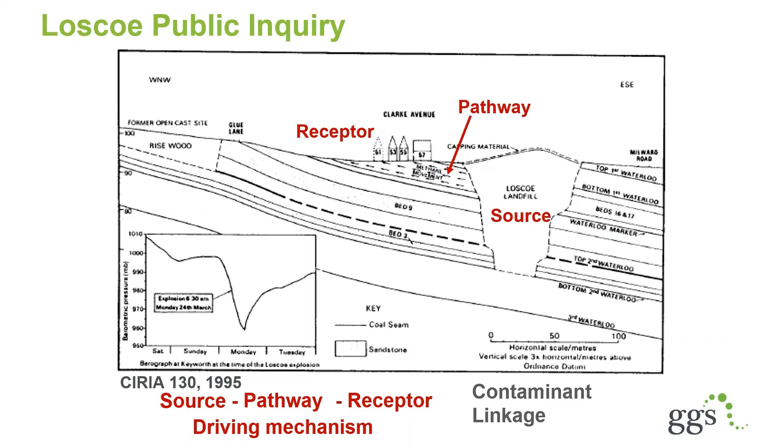Since then, there's been a raft of guidance documents on how to monitor, how to risk assess ground gases, but we still have incidents occurring. And one of the more significant or more serious incidents took place in Scotland in 2013.

This was a modern social housing estate built by Midlothian Council in 2009. But unfortunately, in September 2013, a number of the council tenants were overcome by gas. They were rushed to accident emergency, and the affected properties were evacuated.

Because other people on the housing estates were also affected over the following months, by April 2014, the local NHS trust set up an incident management team to investigate what was going on. Their findings identified the source as being shallow mines gas from shallow mine workings immediately beneath the estate.

In 2016, the local authority came to the decision to actually demolish the whole estate and start again as a way of treating the problem. None of the properties had ground gas protection systems installed within them. I should say that there was a number of court cases, and the leading consultant who led the development actually ceased trading as a consequence of legal actions.

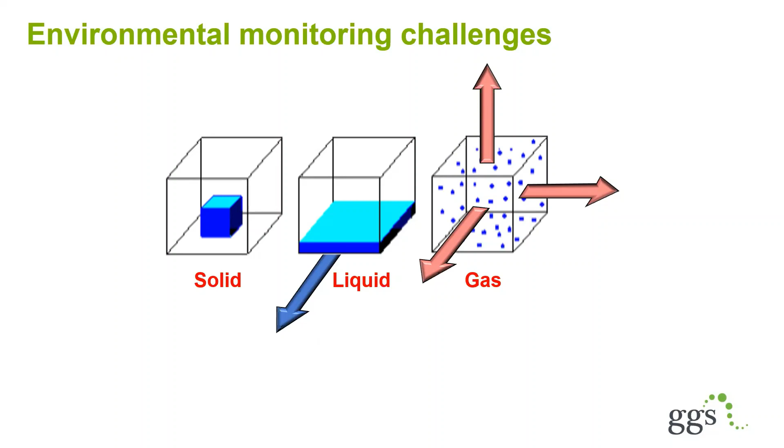Liquid contaminants will flow down to the water table and then flow down gradient, so they have a predicted plume of contamination which flows down gradient and can be modelled and predicted. However, ground gases can expand and contract and potentially move in all directions, so much more variable than other forms, and more so because of their viscosity.

The viscosity of water is given there, but of air or ground gases, that has a viscosity which is 50 times lower, which means that it can move through the ground quicker and go further than an equivalent liquid contaminant.

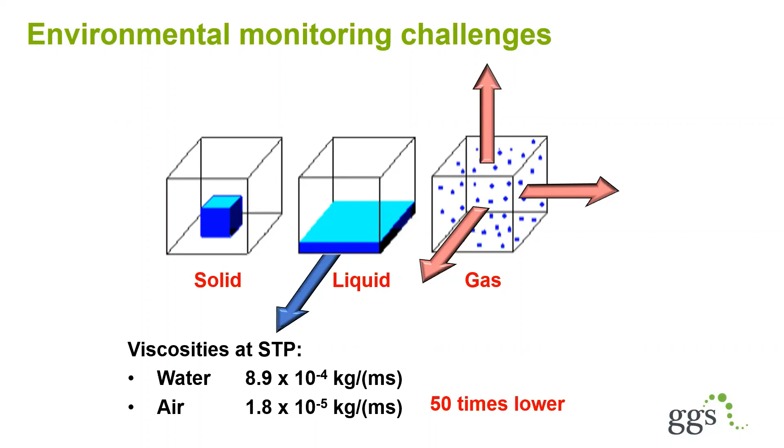So how does ground gases move through the ground? Well, it's got three forms or three modes of transportation. We have that advective pressure-driven flow, as we saw in Loscoe. We have a diffusive flow where it moves from areas of high concentration to areas of low concentration. And that typically occurs around sources of contamination, such as former landfills.

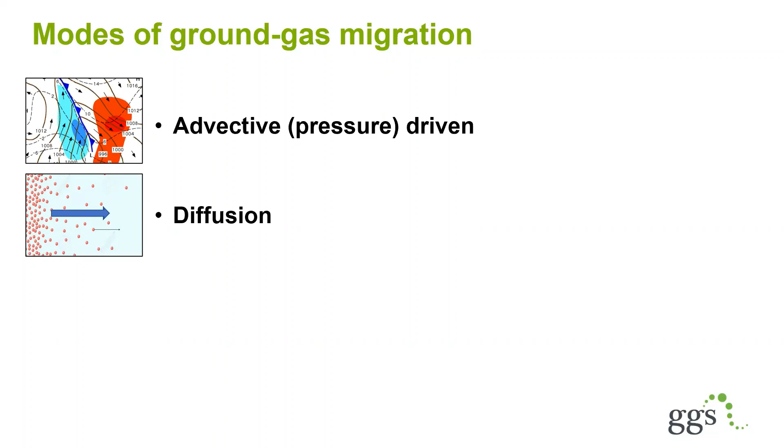The Environment Agency has calculated that there are probably 21,000 former landfills in England and Wales. Every town and city will be surrounded by a ring of those former landfills, and a lot of our work is associated with them, particularly as new development expands out from where towns or cities used to be, moving onto areas which were thought to be out of sight, out of mind. Those former quarries and gravel pits that have been infilled with waste are now in prime development locations and are often a major cause of ground gas contamination.

So those two modes of transport occur in the unsaturated zone above the water table. But we also can get gases dissolving into the groundwater and travelling down gradient below the water table. So those give us the three modes of transport.

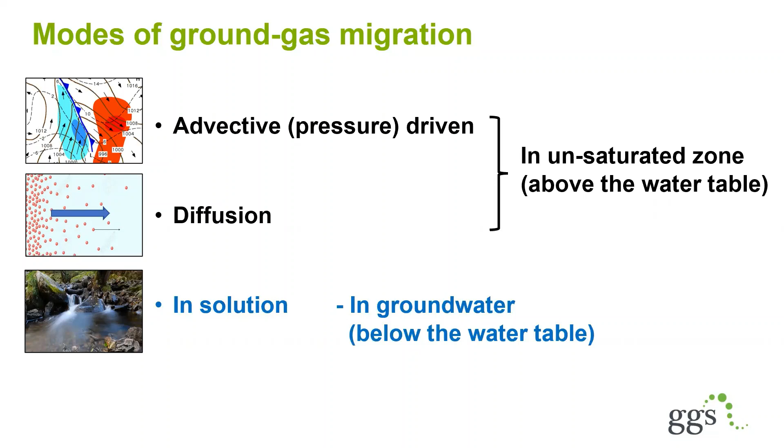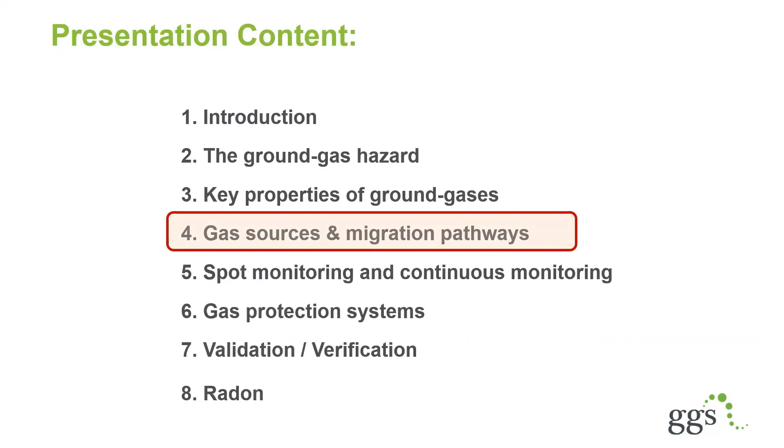Let's look at that source pathway receptor pollutant linkage in a little bit more detail. In line with British Standards guidance, BS 8576, where ground gases are expected to be present, it is required that a conceptual site model, including a schematic cross-section, is presented as part of the risk assessment process, so that the sources, the pathways and the receptors and the relationship between them can be clearly identified and communicated to all the stakeholders, which may include non-technical people. A diagram such as this is a way of clearly defining or describing the issues involved.

With regard to risk assessment, there are a number of tiers that can be considered. Tier 1 risk assessment is the simplest - is there a credible contaminant linkage between a gassing source and a potential receptor? Then we go through generic risk assessment tools, and finally detailed quantitative risk assessments. But for all of these, what we need are multiple lines of evidence feeding in, so that we have confidence in the decision-making process.

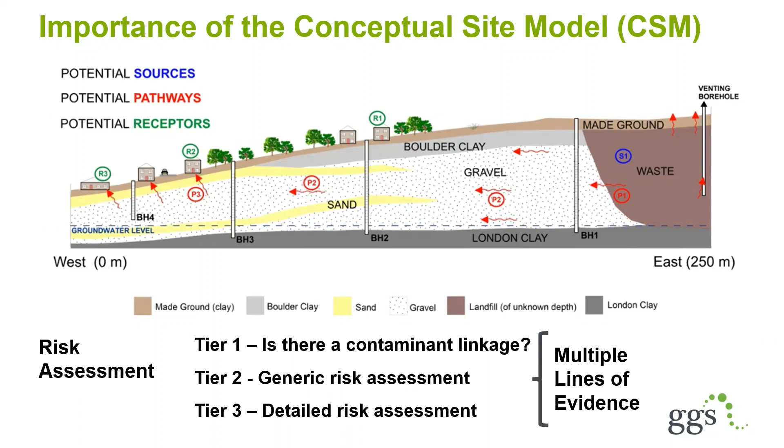Let's look at sources in a little bit more detail. The two factors we are concerned with are gas concentrations and gas flow rate - in other words, the gas generating rate or the volume of gas that may be present in the ground.

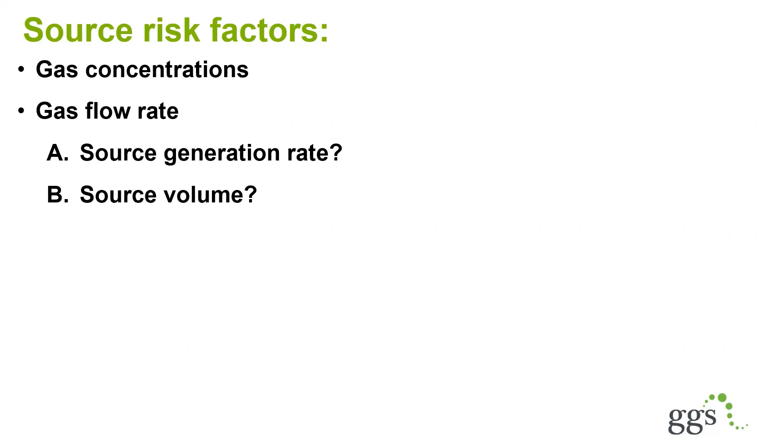Sources may include, for instance, a modern licensed landfill where you've got containment systems, gas extraction systems and gas management systems in place. Putrescible waste, household waste, in these sorts of landfills will be generating landfill gas at a concentration of 60% methane, 40% carbon dioxide, at a rate of 10 cubic meters per ton per year. So when you've got a 50,000 ton landfill, that's a lot of gas which is generated and has to be managed safely in some way.

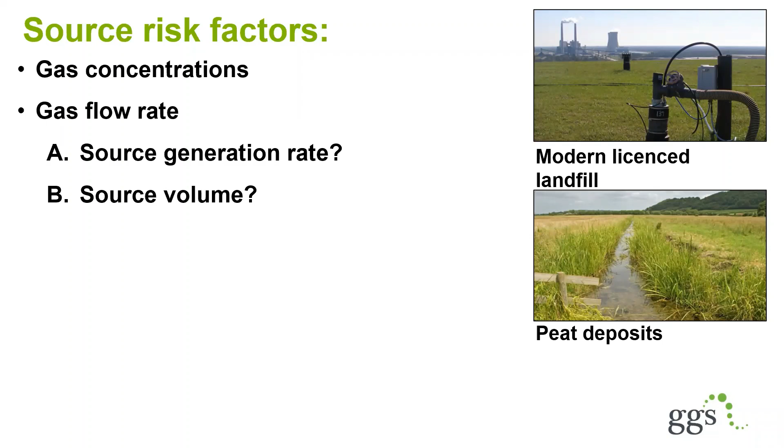At the other extreme, we have natural deposits of organic material, such as peat deposits, which will also generate ground gases. Peat, specifically when waterlogged like this, will have anaerobic conditions and be generating methane at concentrations up to 90% by volume, but at a very, very slow rate, so the volume of gas generated is very low. As a consequence, people who live in peaty areas or where there's waterlogged organic soils present are not really at risk. Everyone who lives on the Somerset levels has been safely living there for decades, if not hundreds of years, despite methane being generated beneath their feet.

Then we get the former landfills, and these typically fall between those two extremes. A lot of them date back to the 1960s and 1970s, when the Clean Air Act prevented households from burning, from having open fires as their means of heating. All those newspapers and potato peelings, which had previously been put on the domestic fire, were then collected as municipal waste and taken to those convenient holes in the ground beyond the town boundary. This is why we have so many of these former landfills - 21,000 of them.

And then we have brownfield sites - those former industrial sites where there may have been some landfilling in the past, either deliberately within the curtilage of the factory, or by accident, with spilled contaminants or chemicals soaked into the ground. And they may give rise to sources of VOC as well as methane and carbon dioxide.

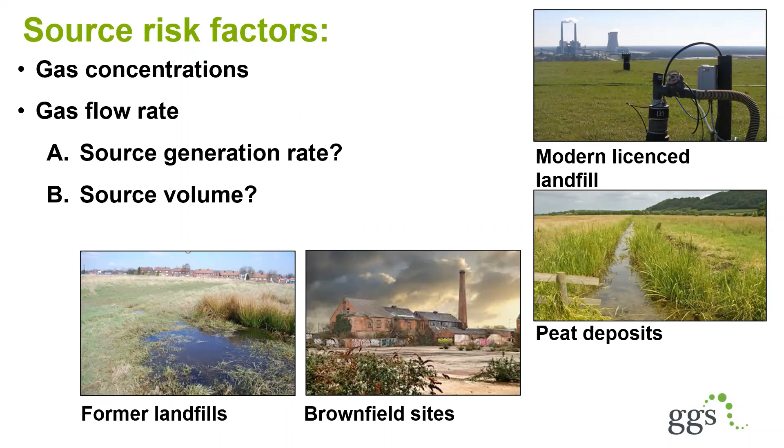But also not forgetting another major source of ground gases, and that is our coal fields. Perhaps not so important in Hertfordshire, but elsewhere in the UK, coal fields are extensive and have been actively mined at shallow depth across large areas. Indeed, 11% of the footprint of Great Britain is actually underlain by coal fields. So a significant number of people live in and over these former mining areas.

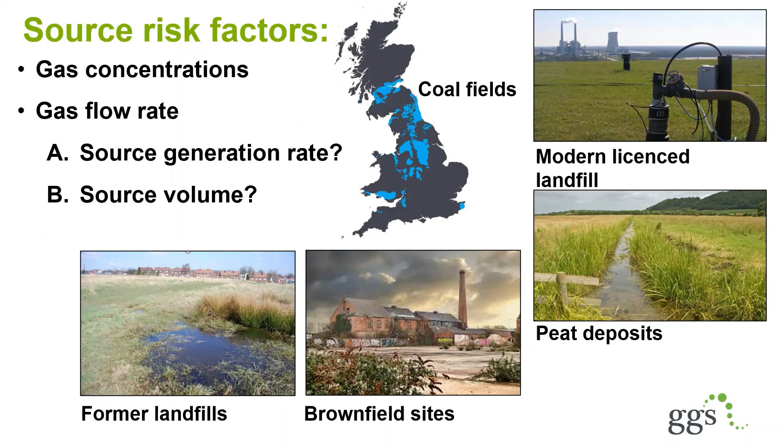So let's look at pathways. And here we are looking at identifying potential sources of ground gas, either naturally occurring or often man-made, often landfill gas, and understanding what the site geology is and how the gases may be migrating through permeable strata to reach a receptor.

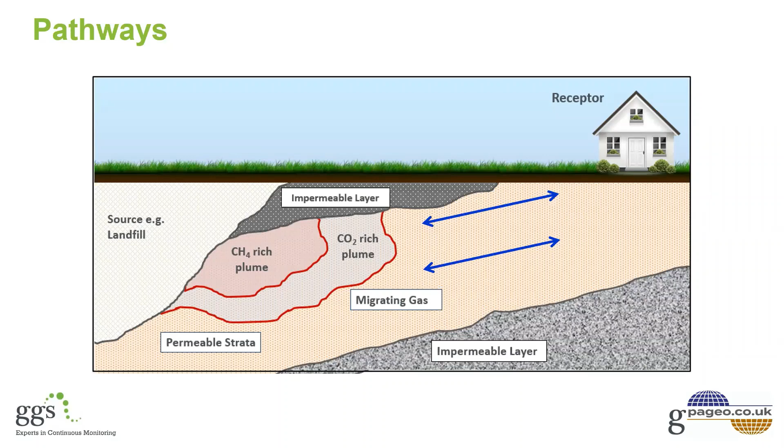And that permeable strata may be sedimentary deposits, but also may be rock deposits, fractured sandstones, fractured igneous rocks - even things like basalt can be a pathway for migrating gases. The receptors themselves also come in different shapes and sizes.

We can have residential properties, and they are often considered to be the most sensitive because people may actually be occupants of those buildings for 24 hours a day. Business properties, commercial properties, are usually only occupied for the working day, perhaps 8 hours. As a consequence, they have a different risk profile.

But we should also consider construction site workers, as holes in the ground - excavations - can also represent confined spaces where ground gases can accumulate, particularly carbon dioxide. Carbon dioxide is a particularly nasty toxic contaminant and asphyxiant, which is heavier than air and can accumulate in these below ground excavations. Unfortunately, over previous years, many construction workers have been killed by asphyxiation by going down into excavations filled with carbon dioxide.

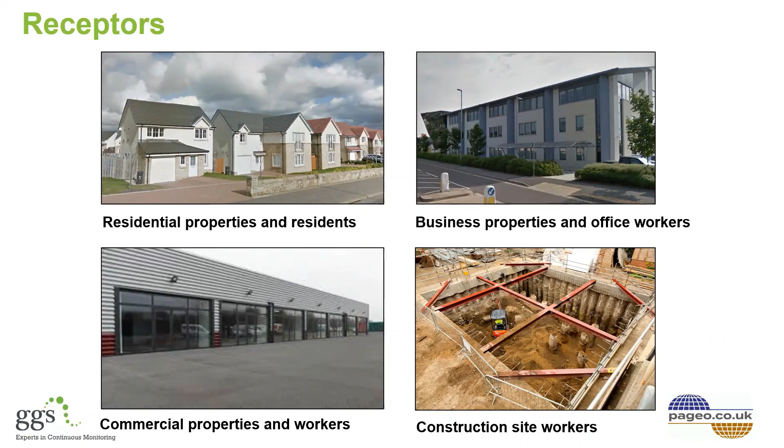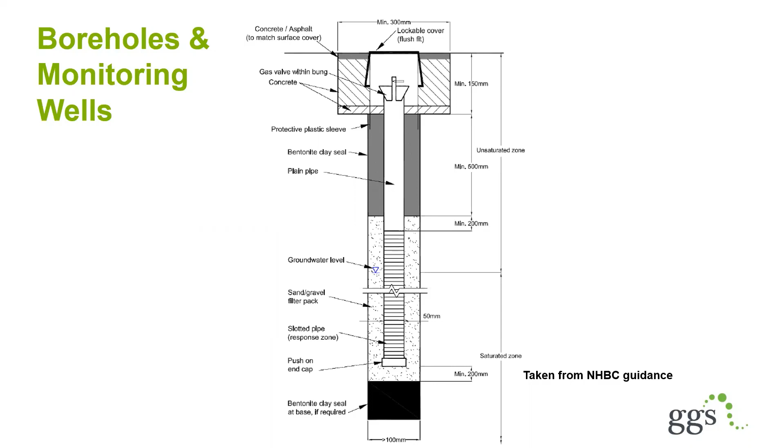So moving on, let's talk about how we monitor and risk assess them. The principal tool is a monitoring well. A monitoring well is a scientific instrument that is constructed within a borehole.

Now, drillers are paid to drill boreholes, and if they are encouraged, they will build a monitoring well inside those boreholes to a specification such as this, where you've got a top seal, bentonite seal, slotted response zone section, and a bottom seal, and hopefully a sand filter pack around that response zone.

Sometimes there'll be shallow groundwater, and the shallow groundwater may also be present within that response zone. Monitoring takes place in the headspace above the response zone, in that plain pipe section, through a gas tap which you connect to your monitoring device.

The groundwater level is also really important, and if you think of it changing - if it rains, the groundwater level may come up as rainwater percolates down to the groundwater level and increases, making it rise. The rising groundwater level will act like a piston on any gases in the unsaturated zone and pressurize them and force those gases into any overlying structure which may be present. So understanding and measuring the depth to the water table is also a really important part of ground gas monitoring.

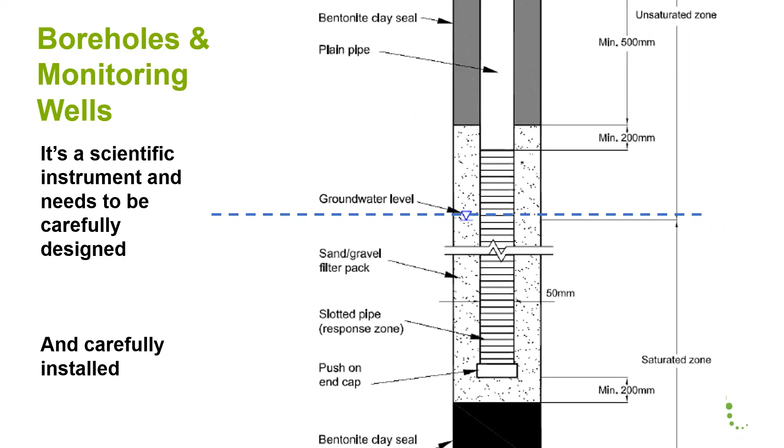So how do they work in practice? Well, the monitoring well is constructed within a vertical borehole, so it picks up laterally migrating gases, and those gases which travel laterally are passing through different sedimentary deposits, whereas for buildings that we are interested in risk assessing - or ground gas risk assessing for a new development - they will be exposed to vertical migration. And the vertical to horizontal migration permeabilities may be different. So the consultant needs to understand those.

The main problem is that the monitoring is carried out at a point in time, but after the monitoring has been completed, there may be site enabling works which actually change the gas regime. The sites may be re-leveled, there may be more fill material brought on, there may be excavations taking place which cut through those sedimentary layers and introduce potentially preferential pathways for migrating gases. So this is something which, again, is a pinch point in a lot of consultants' reports. And then the boreholes themselves, if left intact, can act in themselves as a preferential migration pathway directly under a development.

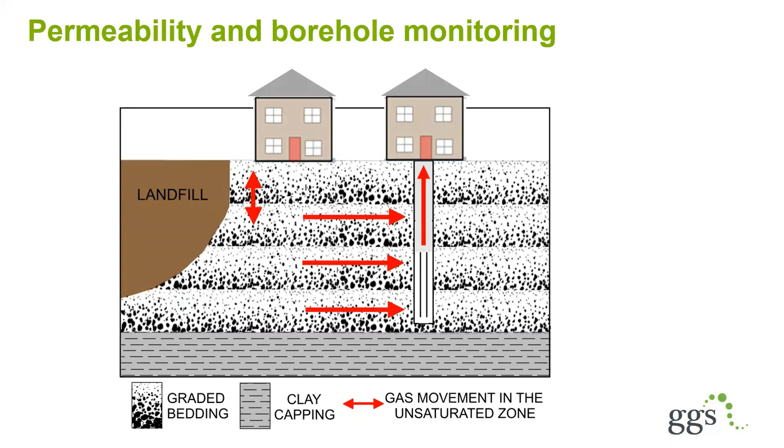So let's look at monitoring in a little bit more detail. Here's a picture of a monitoring well, and the traditional method of monitoring would be to use a handheld device, and there's a whole range of different devices which may be on the market.

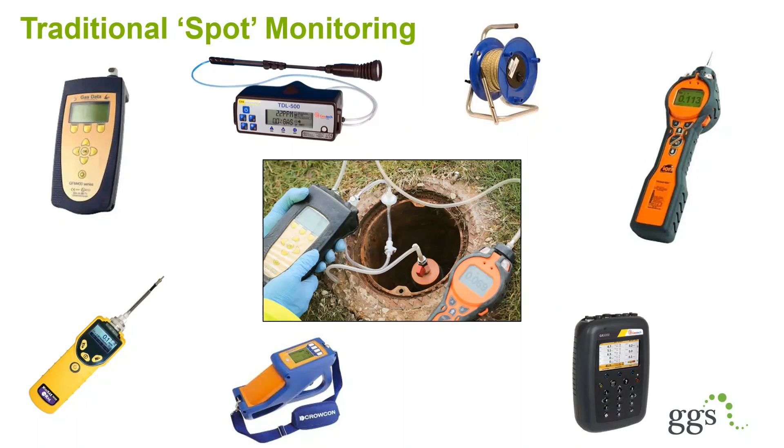Someone traditionally would go to this borehole, go to site once a week or once a fortnight and take a reading from the monitoring wells present. Those readings would be typed up onto tables where each row represents a different monitoring well and each column is a different parameter - concentration of methane or carbon dioxide or trace gas such as hydrogen sulfide, etc. So every week another table would be created, and another table, and another table.

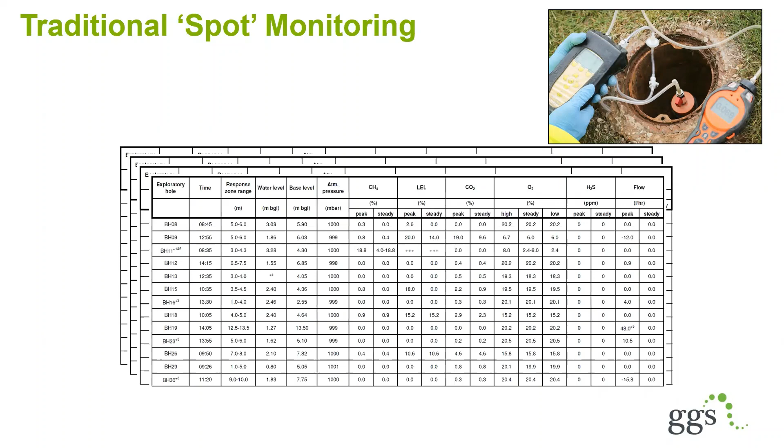It was a difficulty that such tables gave to the risk assessors and to regulators, that in 2006 I looked at collaborating on a research project to look at a better way of characterizing ground gas. And that was successful - we got DTI funding to carry out the research. We set up an expert advisory group of some of the key names in our sector.

In 2009, we actually developed the first in-borehole continuous ground gas monitoring device, the GasClam. And it was on that step-changing technology that I actually set up GGS. So in 2009, we had that first generation in-borehole device, the GasClam, and subsequently we've got other devices on the market. At GGS, we are gradually moving over to gas sentinels, which are smaller, lighter, smarter instruments and give us better quality information.

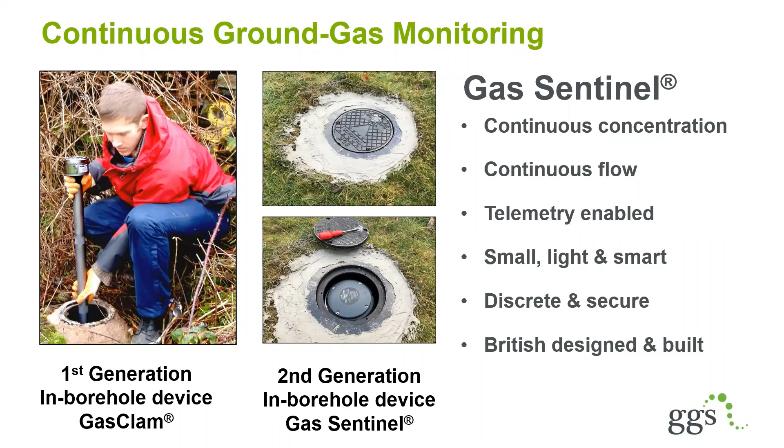So what is continuous monitoring? Well, the definition of continuous monitoring is monitoring carried out by an in-situ device that records time series data at a monitoring frequency that exceeds the frequency of change of a measured parameter. Typically we set our instruments to measure concentrations and flow on an hourly basis.

If we think back to the Loscoe event, that occurred because the atmospheric pressure dropped 20 millibars in 6 hours. So for traditional spot monitoring, going to site once a week really is not helpful in identifying the true risks at a particular site. But by continuous monitoring on an hourly basis, we can see the full range of variability through time.

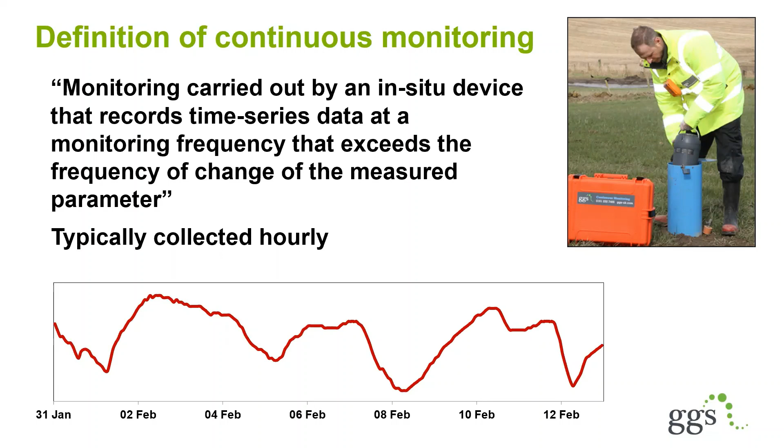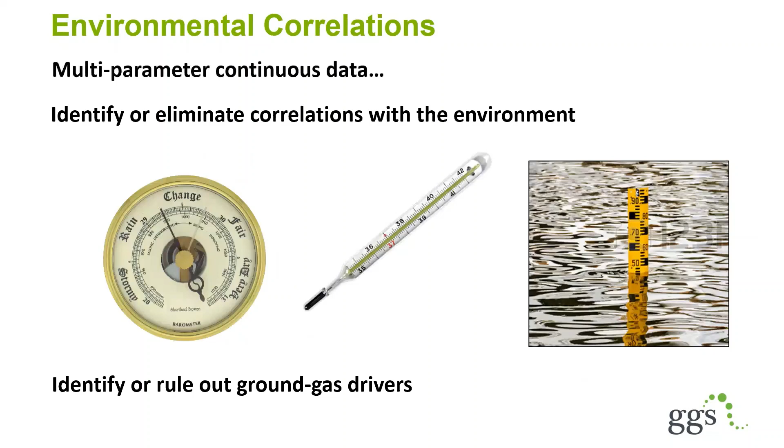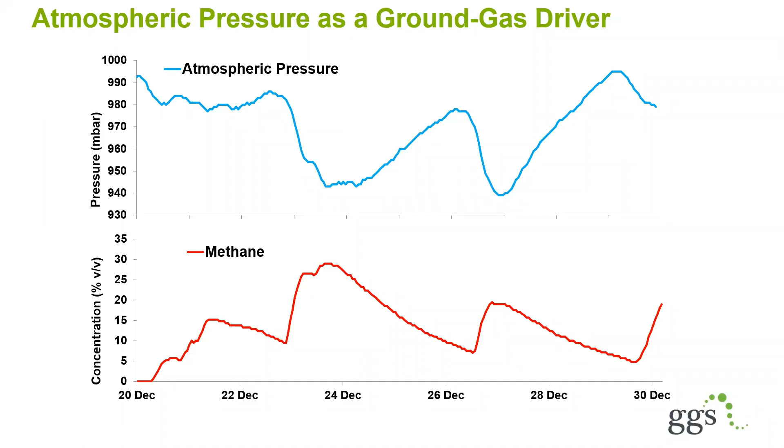But the real value of the technique comes by looking at its correlation with some of the other parameters - atmospheric pressure, temperature, changing in water levels, etc. And seeing relationships where every time there's a fall in atmospheric pressure, we see there's a spike in ground gas concentration, gives us confidence that we actually are seeing something of importance for this particular site.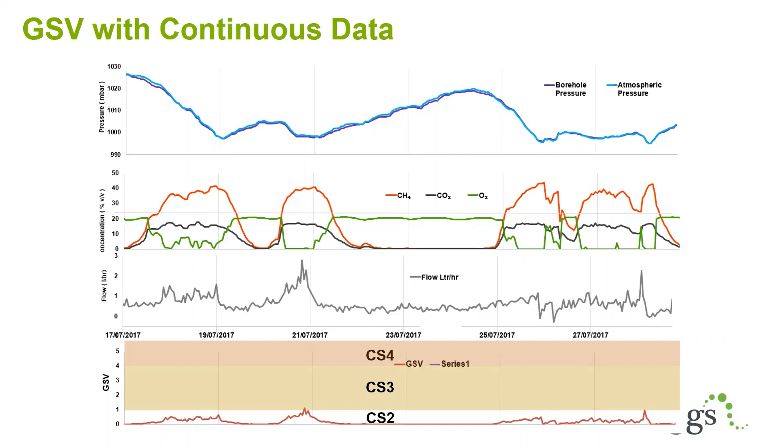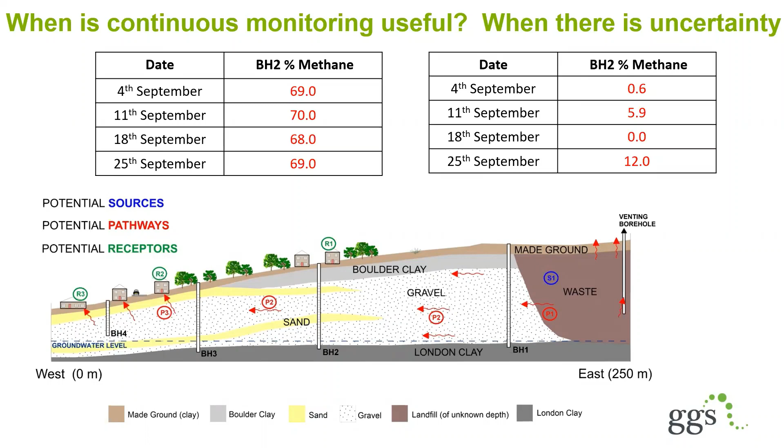So when is continuous monitoring useful? Well, typically when there's uncertainty. So if you have spot monitoring data, which every time you go to site, you see that there is a hazardous gas concentration, you know you've got a problem which needs to be dealt with. It's more difficult to make decisions when you see data like this, where sometimes there's a gas present and sometimes it isn't. On those circumstances, continuous monitoring can be really helpful.

So let's look at gas protection systems. In the UK, we have a very simple approach to protection. We look at diluting and dispersing ground gases by providing a preferential pathway to atmosphere through typically a subfloor void or a granular layer beneath the floor of a new building, and excluding the ground gases from the living space. So a two-pronged approach - two techniques go hand in hand in protecting new development.

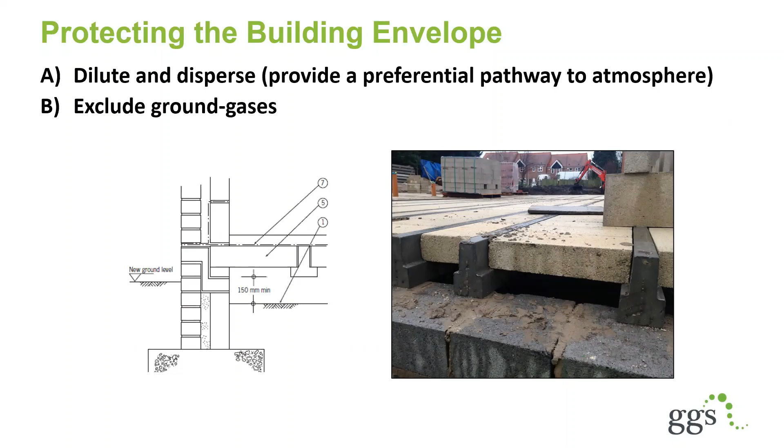So in respect of the membrane, that will go over in a residential development, typically will go over the block and beam floor and cover the cavity wall out to the edge of the building, and the subfloor void and vents allow any gases which accumulate underneath to be safely vented to atmosphere.

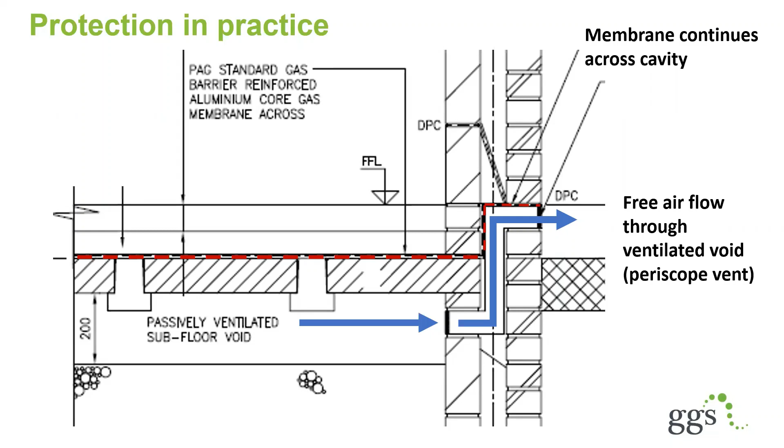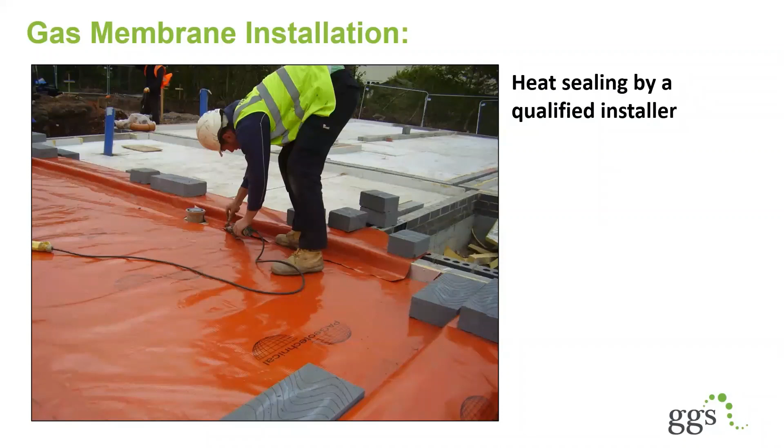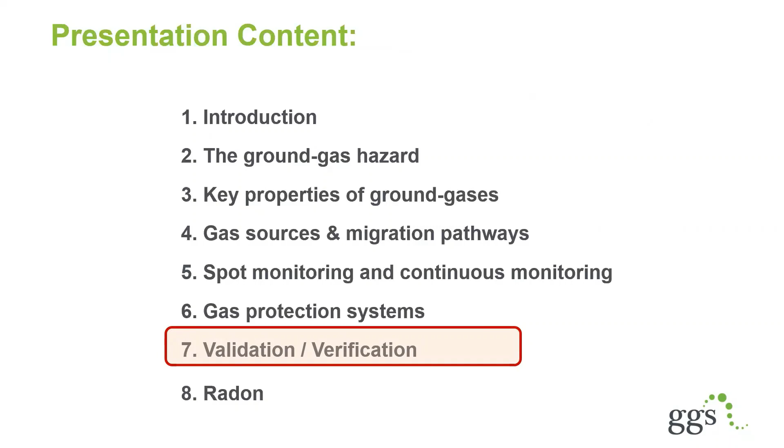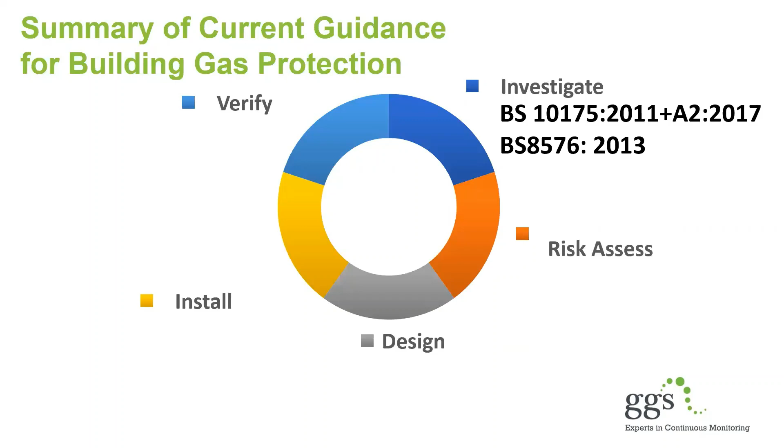So this leads us on into validation, or verification as some people refer to it. And this is the final piece in the jigsaw, really. We investigate ground gases, and these are some of the reference documents covering that element. We risk assess, and we design, and then we install. Verification is covered by this guidance document, CIRIA C735, which was published in 2014, and that throws a focus on the installation.

And installation is the one element which can negate all the other work that has been carried out. If it isn't installed properly, all of the investigation, risk assessment, design work is done for nothing.

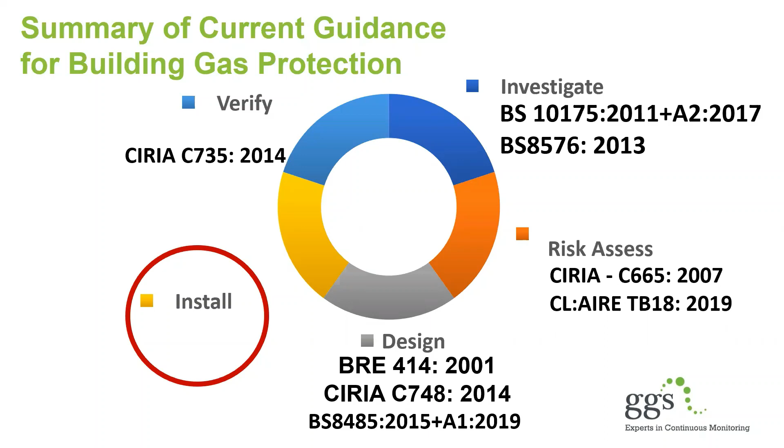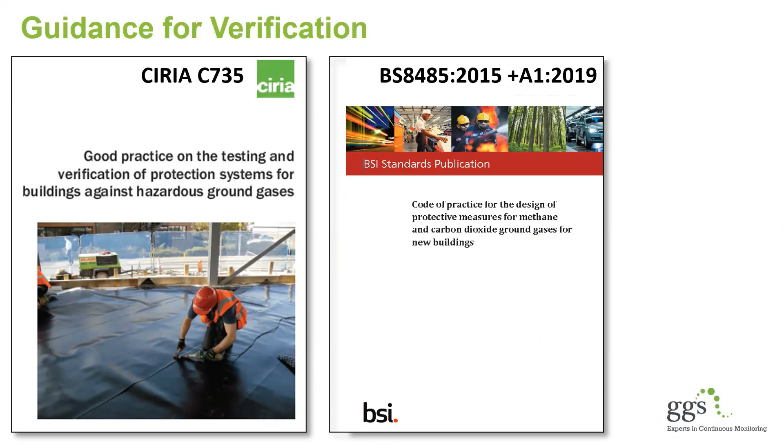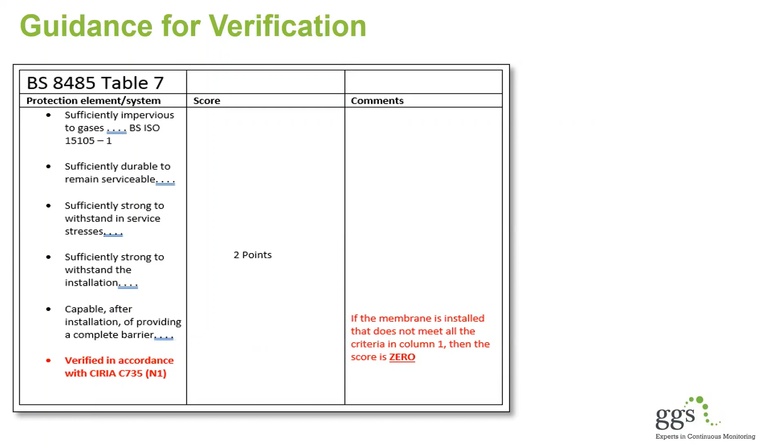So focusing on verification, these are the two documents which set out what needs to be done. BS 8485 makes reference as a nominal reference to that. It's a technical document which gives scoring points for different types of risk, for different types of development. But the point is that the requirements for gas contaminated sites, certainly of CS3 and above, you need an independent verifier, you need a verification plan, you need a verification report. And best practice would require a qualified installer and a qualified verifier.

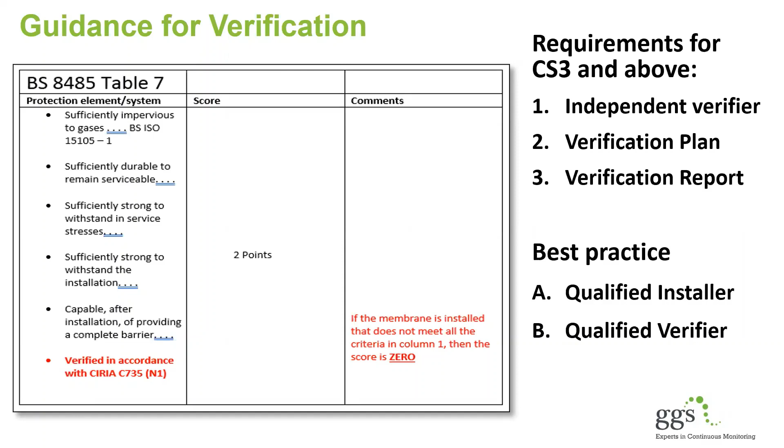What is a verifier? Well, C735 sets out that a verifier should be a competent, experienced, and suitably trained person who has immediate access to appropriate technical support where needed or necessary. And the emphasis there is on an independent third party.

Unfortunately, all too often, you'll find that there are companies which pair up and they will offer verification services for their partner company. I'll do yours if you do mine. And that is not an independent, impartial verification process. You need to keep a close eye on who is doing the verification. So please try and avoid that.

So what do some of the problems look like? Well, this is a verified gas membrane. One of my colleagues, my technical director, John Naylor, did a verification report on this development for these particular plots. And he was invited back a few days later to verify the next plot along. And he saw this.

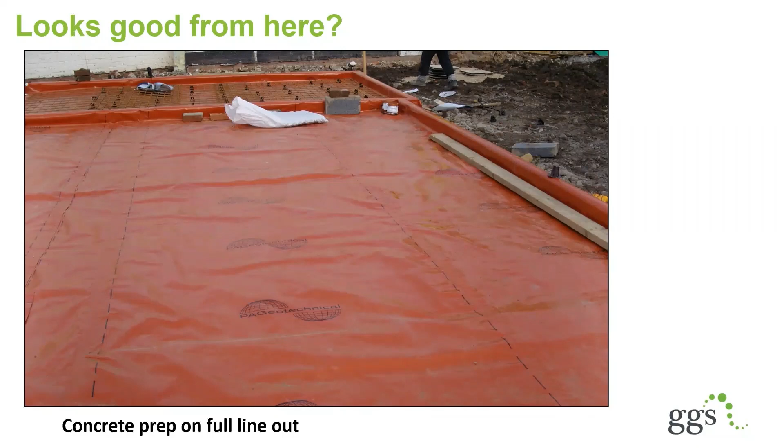It's a full line-out gas-proof membrane, which was installed and verified. But if you look at the back of the photo, you'll see that the follow-on trades have started putting in the steel reinforcing. The steel reinforcing was cut to length in situ. And by cutting the steel in situ, they put something like 500 holes in the membrane. So John had to retract his verification certificate for this property. Basically, the gas-proof membrane was trashed by the follow-on trades. And this happens very, very, very frequently, unfortunately.

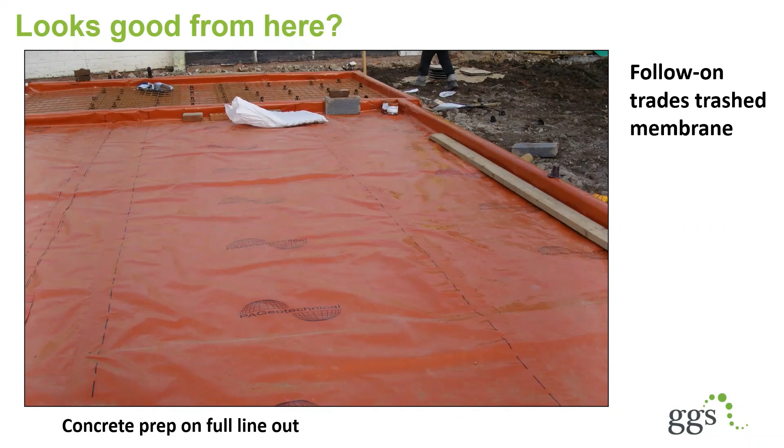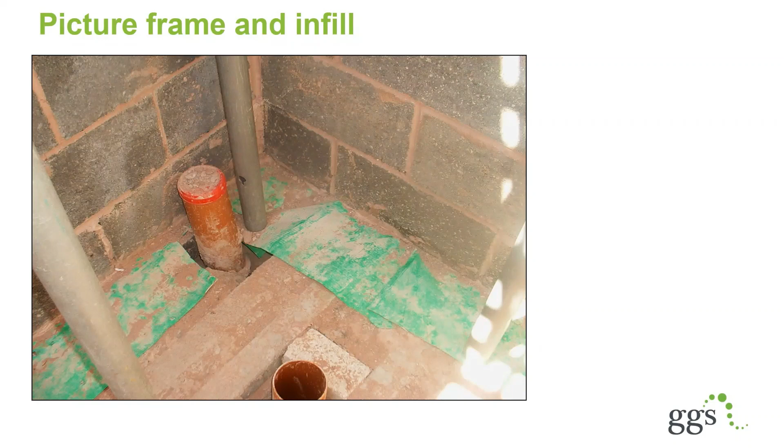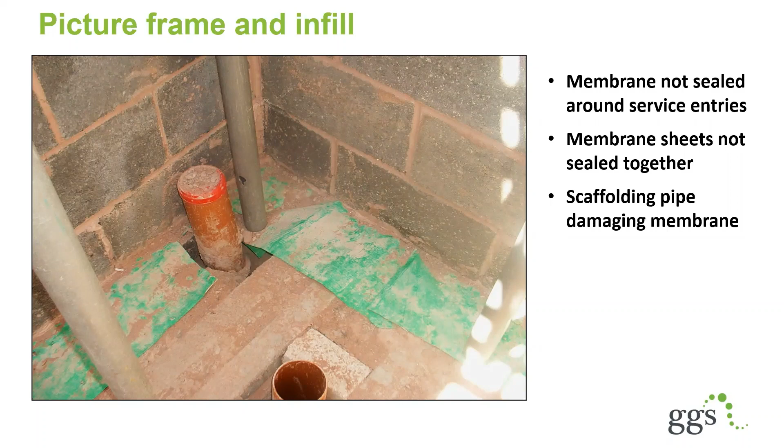Here's another example. This is a different type of, again, it's a residential development, but a different type of scheduling. Here, a picture frame and infill membrane design was used so that the vertical walls could be built up over the membrane, and then once the walls and roof had been put on, the internal rooms could be sealed by another membrane which was fitted out and sealed to the membrane under the walls. Unfortunately, they put a membrane in that didn't seal around the service entries, and the service entries by their nature represent a direct gas ingress point. Also, the membrane sheets were not sealed together, they were just loose laid under the walls, and they put a scaffolding pipe on the membrane, and that in itself has damaged the membrane.

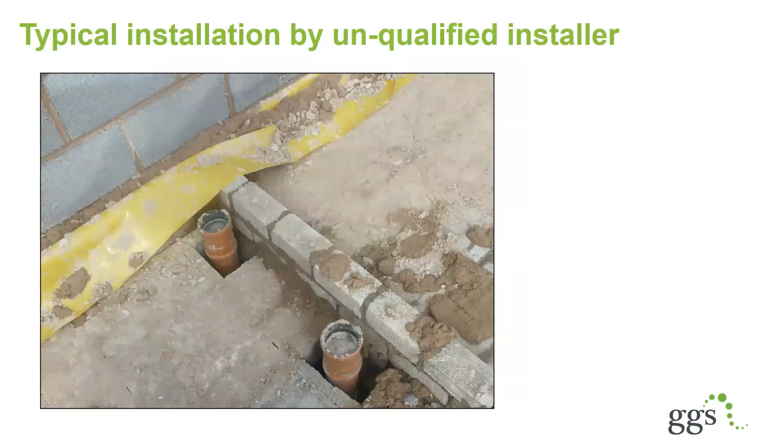Here's another example, which is typical of an unqualified installer. It's a good quality gas-proof membrane, yes, but he has no thought of how the membrane should be sealed around that internal wall. The mortar has been left all over the membrane and all over the floor. So anyone coming into this is likely to damage the membrane by walking on and pushing the mortar through and puncturing that membrane. And also, with all that mortar there, it's almost impossible to install an infill membrane and seal it successfully to it.

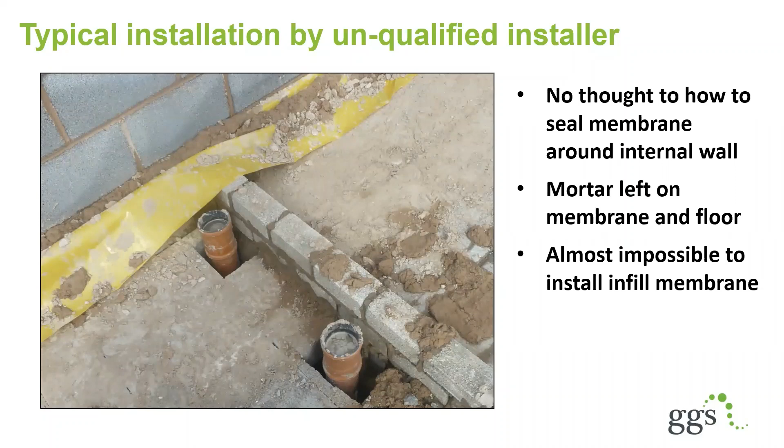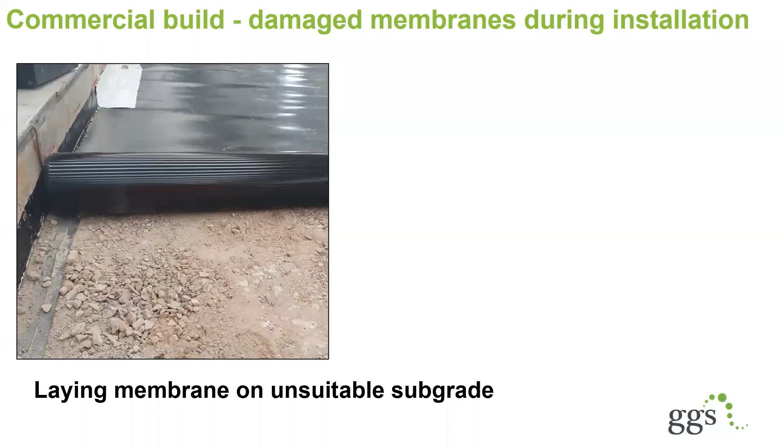So looking at commercial developments, larger footprint buildings like warehouses, another frequent problem is laying a membrane on unsuitable subgrade. Sharp stones have been left and the membrane is just being rolled out directly over those. So if anyone walked on that, it's likely that those sharp stones are going to puncture the membrane, as you can see there.

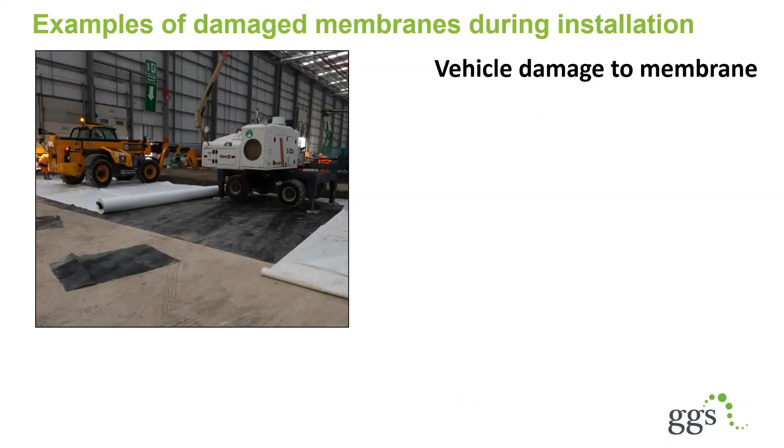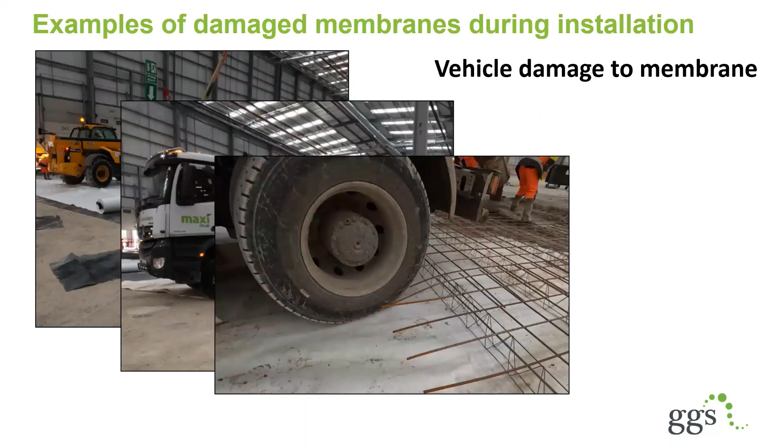Or they put a membrane in, it's been verified, and then they track machines over it. So vehicle damage, a concrete mixer driving onto that membrane. And not only that, driving onto reinforcing bars, which are punctured down into and through the membrane. Takes a lot of time and effort and quite a stiff constitution to deal with the contractors in this situation.

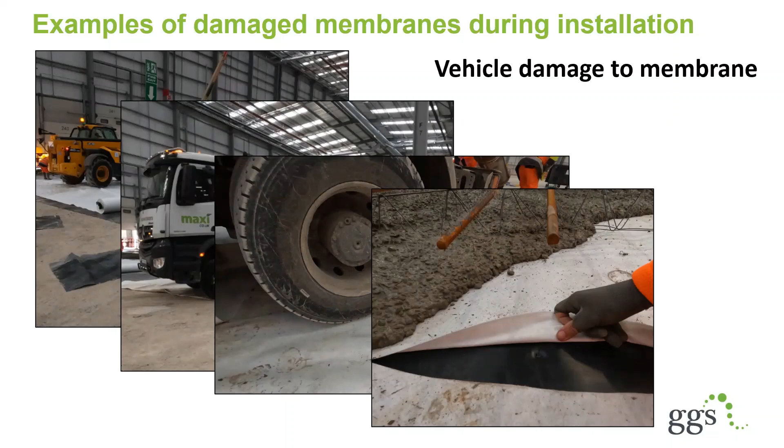But there is a get out of jail card that can be played by developers if they know that the gas protection measures have not been put in properly or haven't been properly verified, or they don't have appropriate records. Then we can do continuous monitoring, receptor monitoring, such as looking at monitoring the subfloor voids, actually monitoring it like a full-scale flux box test to see what are the actual gas concentrations underneath the building.

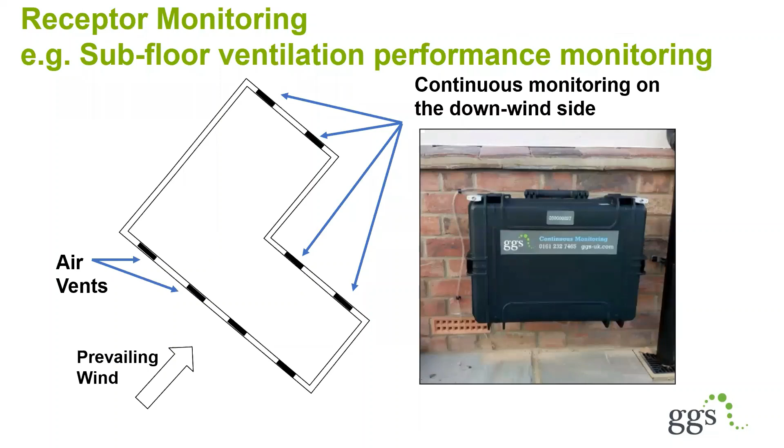Here we have a professional person, a site project manager, who thought he could bypass the regulatory requirement for a verification report by cutting and pasting old validation certificates into his new site. Unfortunately for him, he was caught out and was jailed for 7 months. These gas-proof membranes, the validation and verification reports are designed to protect the end occupants of these buildings, and the hazard is potentially fatal if you get it wrong. So it's really important that all of the steps are taken seriously and carried out.

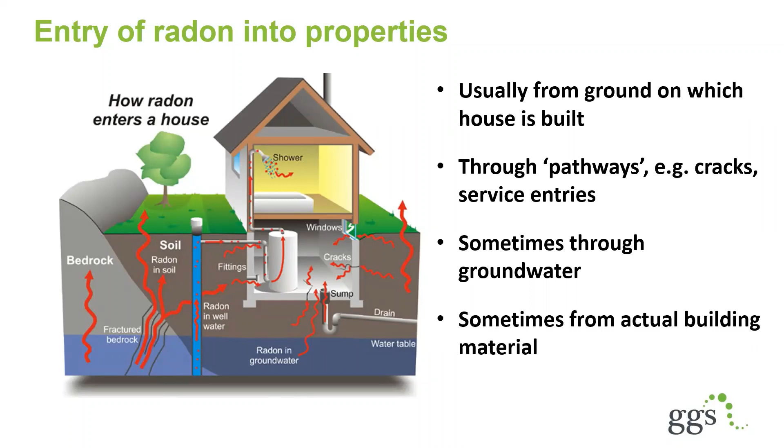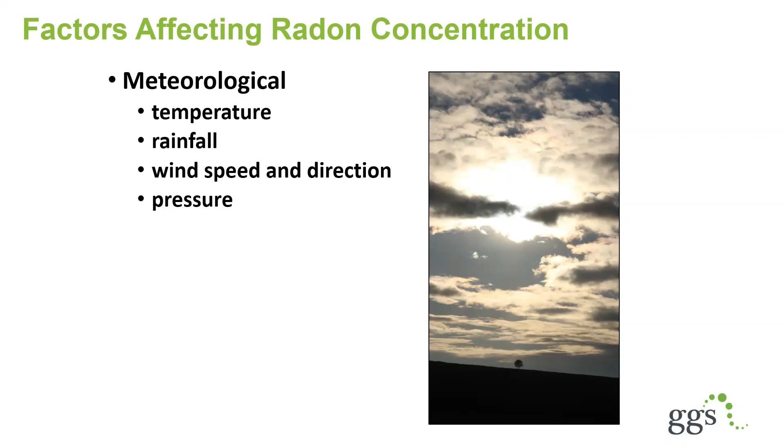The actual radon concentrations in the house themselves are affected by a whole range of factors: the weather, in particular temperature, rainfall, wind speed, and also the time of year. It's very site specific.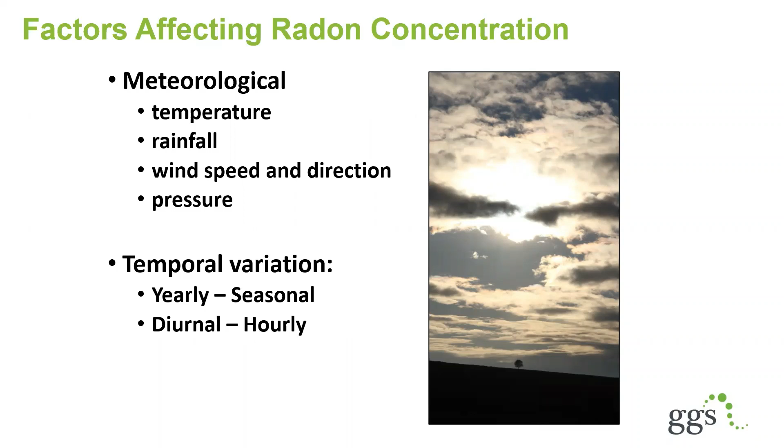The main hazard is the occupants of houses. Occupants who tend to leave their doors and windows open because they like fresh air will have the radon dissipated quite safely and be at low risk. But other people, particularly in this day and age where we are trying to conserve heat, keep our fuel bills down and keep all our windows shut, that's where the greatest hazard will occur. So it's how people use their houses that determines the greatest risk.

And the risk comes from radon being breathed in. Because it's a radioactive gas, it has a very short half-life of just over 3 days. But as it's a gas, people breathe it in and then breathe it out. Unfortunately, if they breathe it in and it decays, it will decay to another radioactive daughter product, which is a heavy metal, and that heavy metal will lodge in your lungs and stay there.

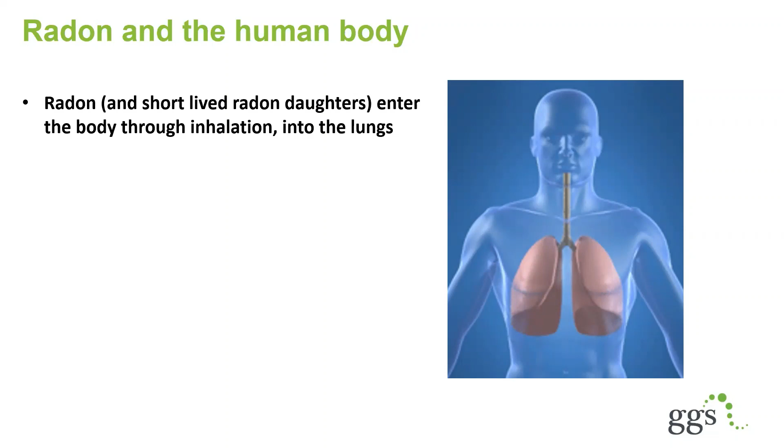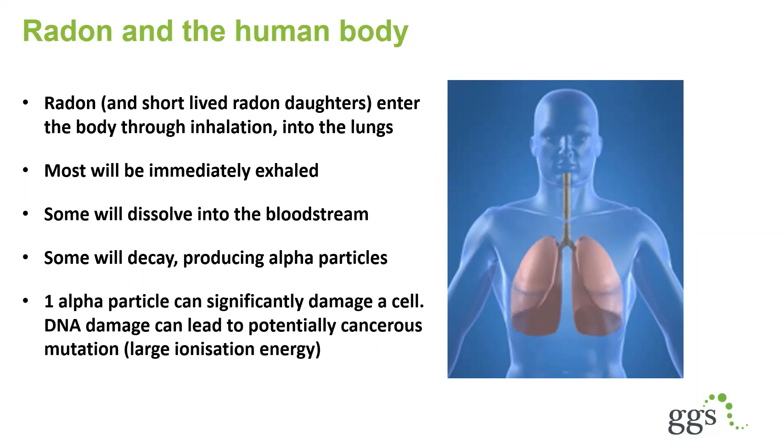So from the lungs, it will travel into your bloodstream. The decay throws off alpha particles, and it's those alpha particles within the membrane of your lungs that actually cause the serious damage. It damages the DNA and can lead to cancerous growths.

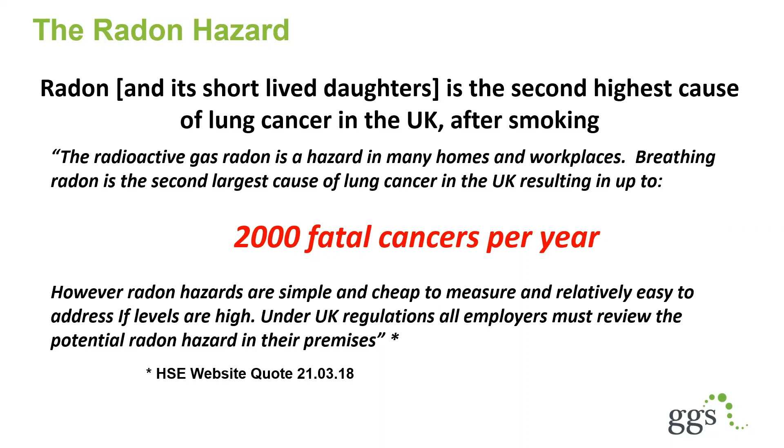The HSE estimate that in the UK there are 2,000 fatal cancers per year caused by radon, leading to premature death. It's a serious matter, and for many years successive governments have kicked the can down the road, and it's not being sufficiently addressed, to my way of thinking. What are the legal requirements?

Well, there are a number of threshold and action levels which are determined for both residential properties and for commercial properties. For residential homes in the UK, there's an action level of 200 becquerels per cubic meter, but preferably a target concentration of 100 becquerels per cubic meter.

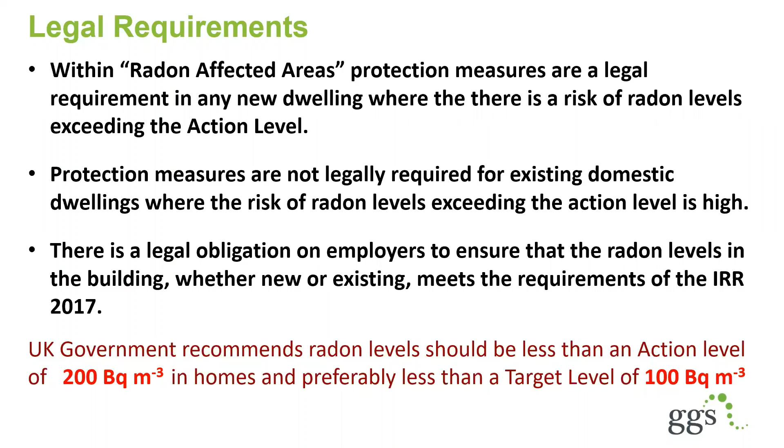How do we actually measure this? Well, we measure it within people's homes using a very simple device, track etch devices. You can write to the HSE and get these in the post.

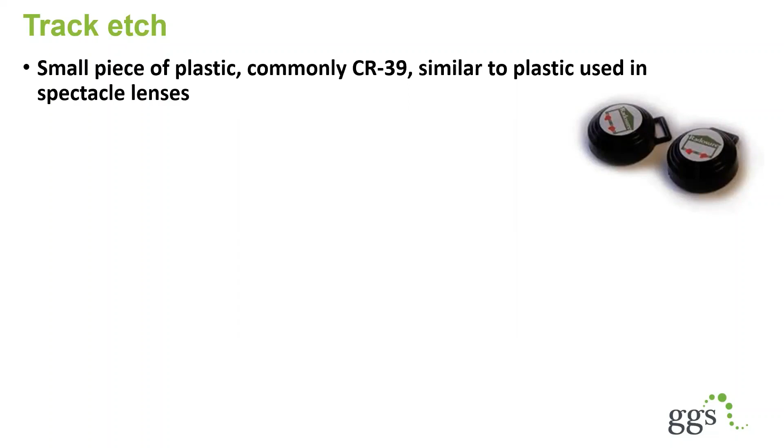A pair of track etch devices and the subsequent laboratory analysis and tests will cost you less than £100. They're small plastic covers holding an internal screen.

The screen is CR39 plastic, the same material used in spectacle lenses, and it's coated in caustic soda. So when a radon alpha particle is thrown off, it collides with that plastic lens and forms a pit, hence the name track etch.

The pits are counted and a time-averaged number comes out. Typically these are left in a home for 7 days for a short test, or 90 days for a more authoritative test. It's a very simple test, and you get very good results from them.

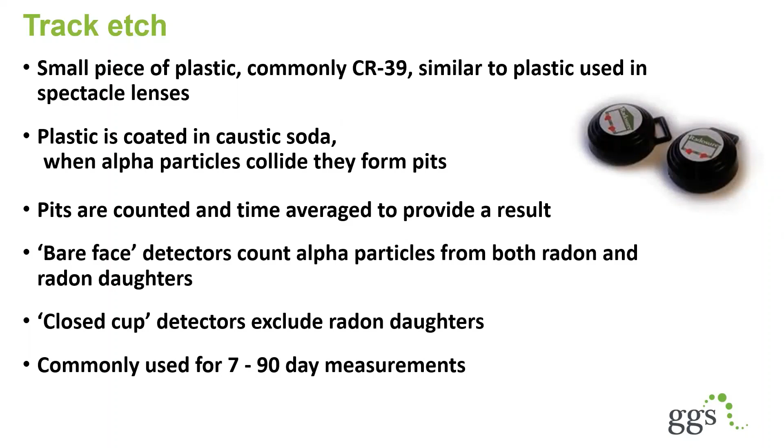How do we protect properties? In the same way that we protect properties from other ground gases, but perhaps with even better quality detailing and quality assurance.

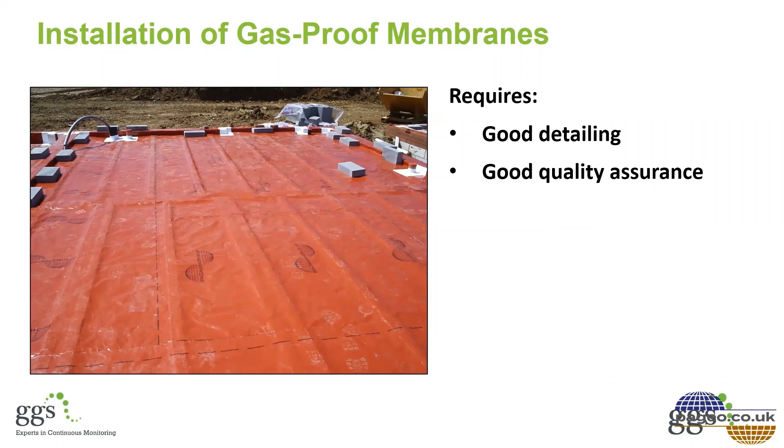Here's an example of a property which we were called to do some radon testing in. This was a commercial property, so it was regulated by the HSE and workplace safety regulations. It was part of a portfolio of offices that this particular company had, and as an employer, they were looking at getting all of their properties radon tested.

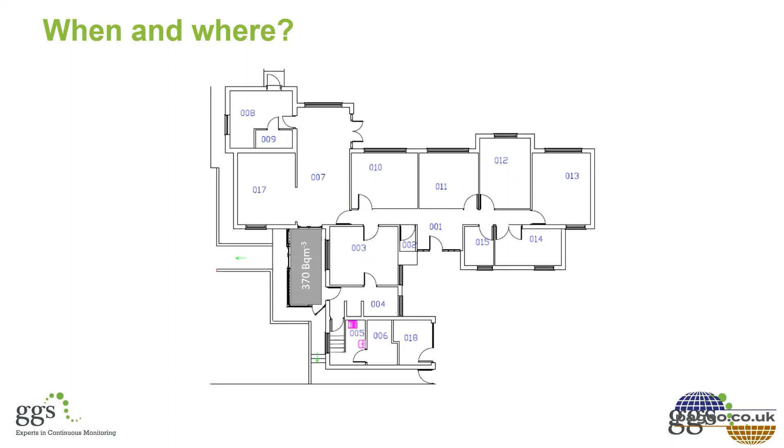As a consequence, the property owner wanted a more detailed investigation, so we were called in to do a more thorough survey, and this is what we found: 900 becquerels, 1200, 1700, 1100, 2830 becquerels in those rooms.

We found 7,830 becquerels in that one office space. So it is very specific to how rooms are used and the site-specific circumstances of a particular development. Putting a track etch device in just the foyer of this building certainly wasn't a suitable tool for risk assessing.

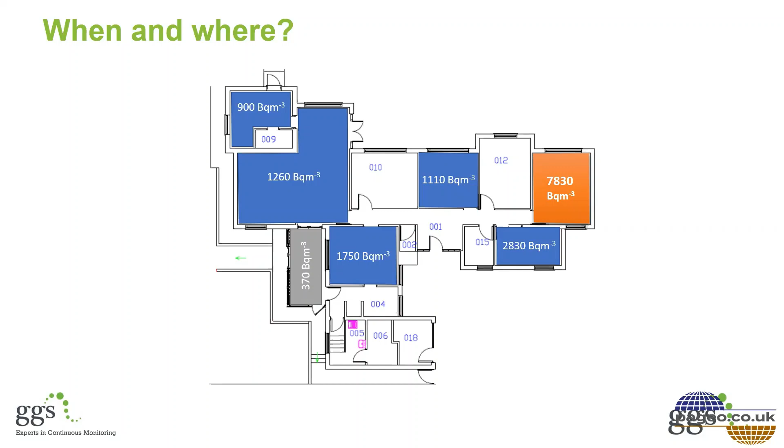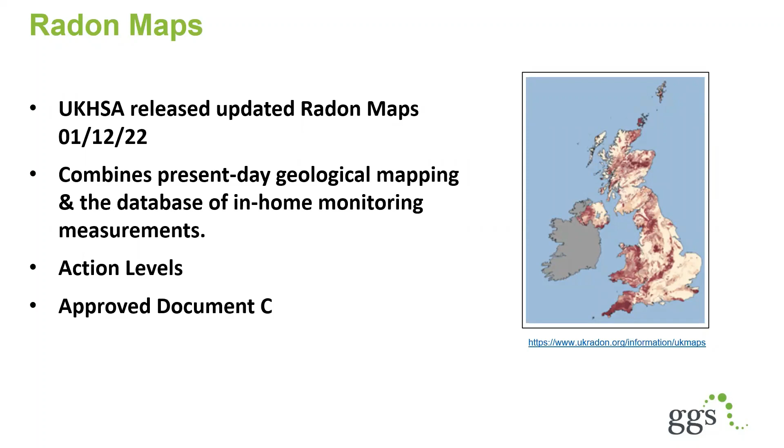We've got High Wycombe in the bottom left here, Stevenage in the top right, and you can see the different colours represent different concentrations of radon across the area. If there's a white tile, the chance is less than one home in 100 having a radon issue. The darker areas change to 1 in 3. So Abbots Langley and Chesham are relatively high-risk areas.

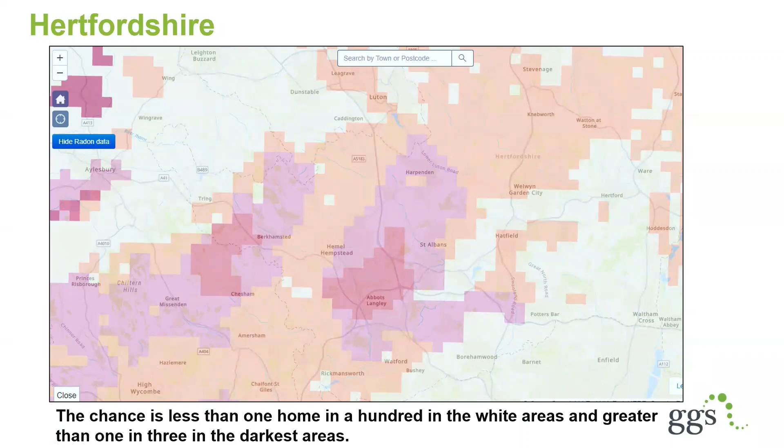I'm sorry, I've run out of time, but I'm happy to take questions.